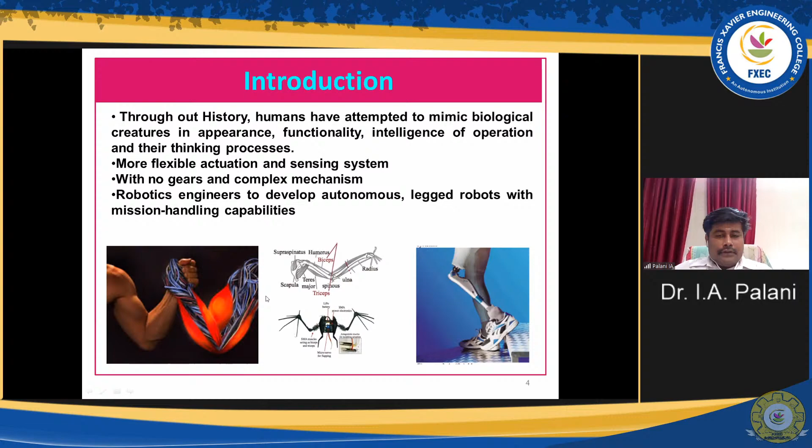For most conventional actuators we use a motor, but that is not possible for many kinds of applications. In biomimicking applications, it is very difficult to follow such actuation. So in those conditions, it's better to use an actuator which mimics the biomimicking capability in nature. Shape memory alloy is one such actuator which has a biomimicking capability.

Let me give you a small video on how a shape memory alloy works and how it biomimics. Here you can see a shape memory alloy being used.

Yeah, it has been programmed in the form of a lotus leaf. So this is a lotus leaf. This lotus leaf is made of metallic petals. When I try to heat it, it enlarges. When I try to cut off, it comes back.

So here we are trying to mimic the biomimicking capability of a lotus flower, just like that. Okay, so this is an added point with respect to the lotus behavior. Okay, so as far as this is concerned, let me just go back to the slides.

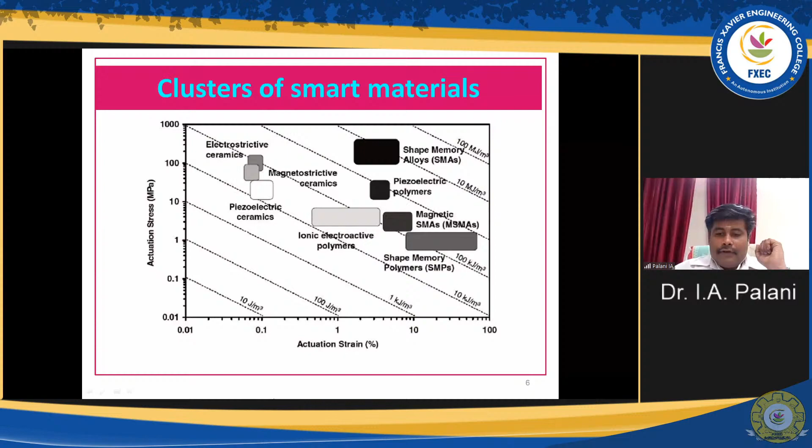So this is the overall family of the shape memory alloy. As far as this family is concerned, if you see, there are a wide variety of smart materials which are available. Among these, shape memory alloy plays a major role. As far as shape memory alloy is concerned, it is basically designed based on the actuation stress and the actuation strain.

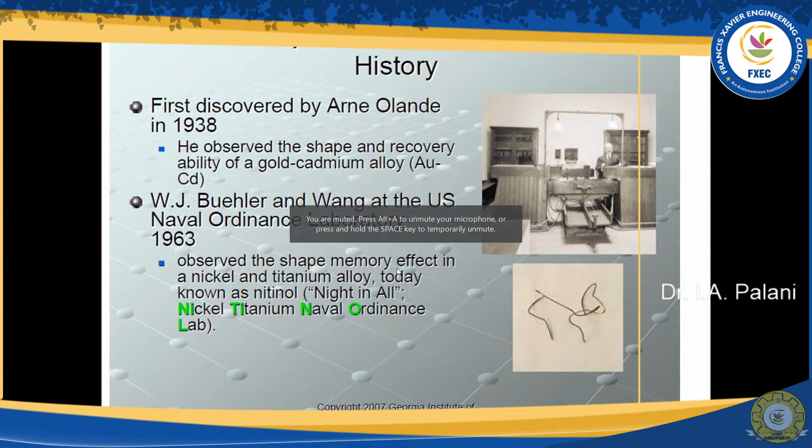If I try to closely observe it, this shape memory alloy was first developed in the year 1938 by Arne Olande, where it was observed that the nickel titanium based Naval Ordnance Laboratory has taken up a major role in it, and based on this nickel titanium Naval Ordnance Lab we have worked on. This Naval Ordnance Lab basically looked into the characteristics of the shape memory alloy.

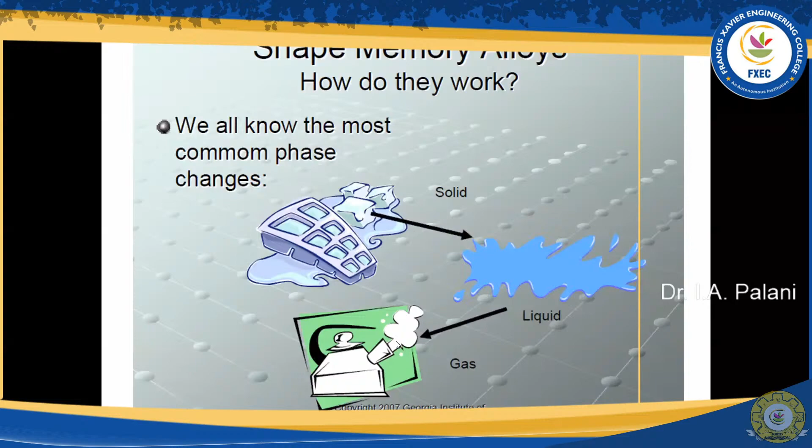As far as the shape memory alloy working is concerned, it is similar to your phase transformations. You have a solid, a liquid and a gaseous phase. From solid it is transformed to a liquid, and from liquid it is transformed to a gaseous phase. So we have a solid phase which is being kept and which is being transformed. So this is how it works.

So basically in this work we have an austenite phase, we have a martensite phase, and we have a twinned martensite. So when we try to look into it, we have an austenite phase which is working out. This will give you better clarity.

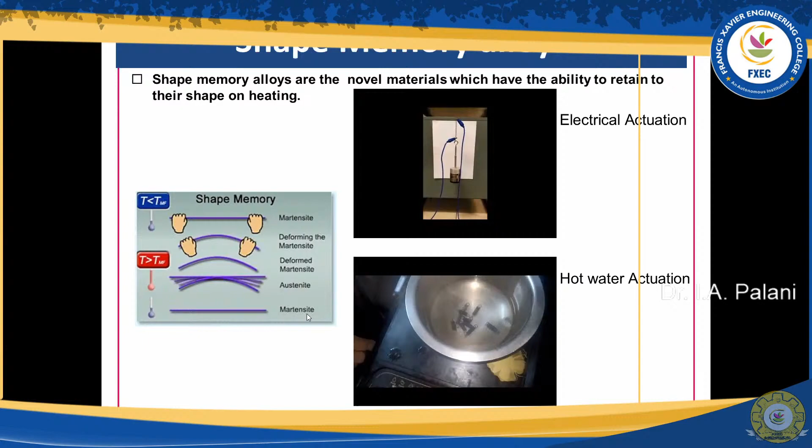Initially, this is in a martensite phase. Now I am deforming this martensite phase, so this is a deformed martensite. When I heat it, it comes back to the austenite phase. Then again, slowly it comes back to the martensite. So when I give the hot actuation, it tries to expand and it comes back. This is the overall perspective of shape memory alloy based actuation characteristics.

Okay, so now we have to look into some of the behavior where I have a shape memory alloy embedded into it. By actuating it or just placing it in hot water, it comes back to the original shape. These are the overall combinations: nickel titanium based, NiTi based, CuZn based, CuAl based, and Fe based shape memory alloys are some of the combinations which exhibit shape memory behavior.

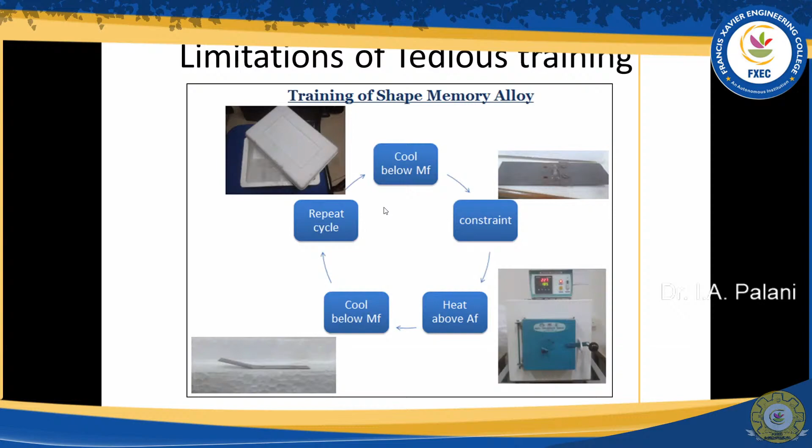These are some of the applications with respect to the tedious training. As far as this training is concerned, there is going to be a repeated cycle, and with respect to the cycle you will be moving on. The overall challenges involved are: one is tedious training, another is influence of composition, third is the thermomechanical behavior, fourth is developing towards the required shape memory alloy aspects. These are some of the basic challenges which we are going to look into.

Okay, so first let us talk about some of the aspects of developing commercial structures. This is the overall content of my talk, where we will be talking about one of the characteristics called shape memory alloy bimorph.

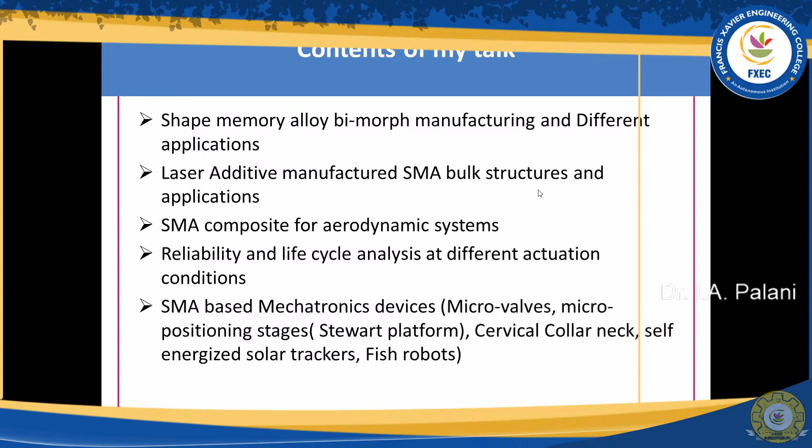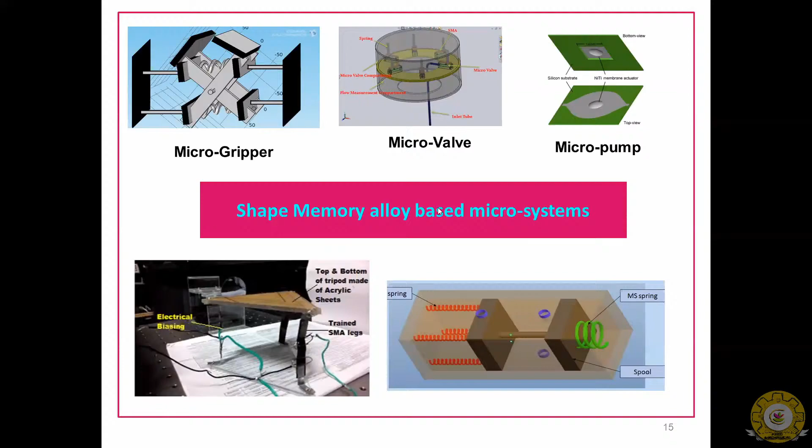As far as this shape memory alloy bimorph is concerned, we have developed some bimorph based structures which I would like to explain. Let us consider a thin film coated on a bimorph. One way of actuation happens because of the shape memory alloy, and the return way of actuation happens because of the bimorph.

Unfortunately, this is not working so well. One way of actuation happens because of the movement, and the other way happens because of the return stroke.

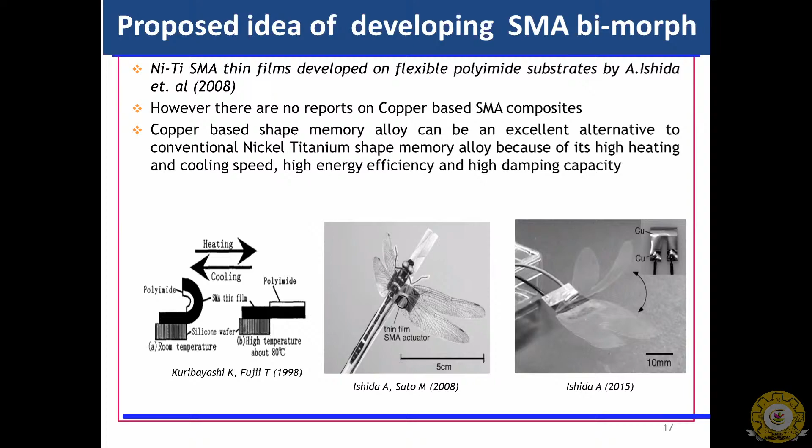With this, we can have a potential application towards a dragonfly kind of arrangement, so that by continuously actuating it, we get movement in such a way that you can go for lift kind of structures.

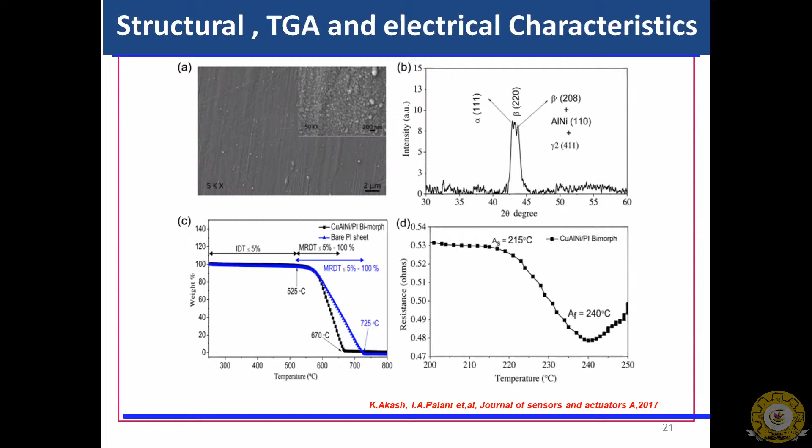We went for a detailed analysis of this. We looked into the different structural and electrical characteristics of the system, explored different substrate behaviors, and went on to a detailed analysis.

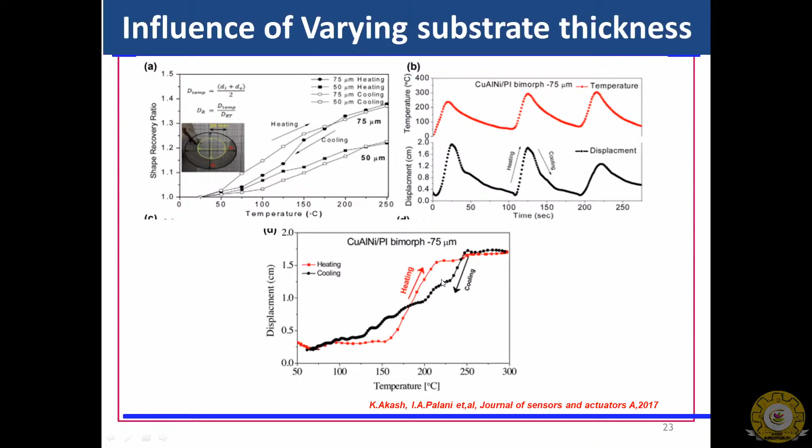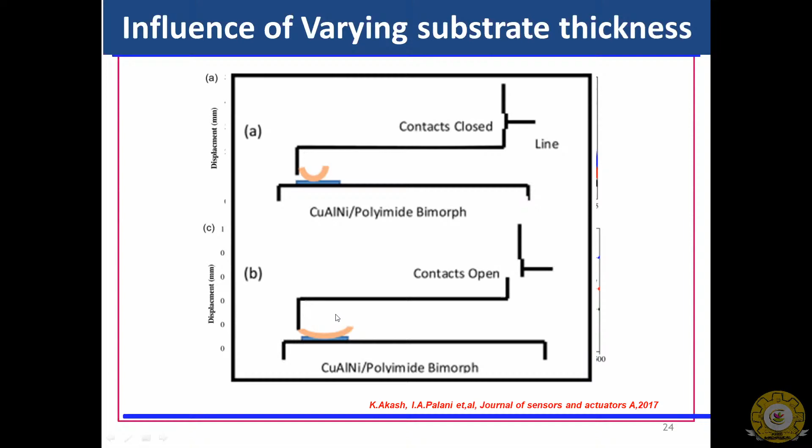This is how a contact is established. Here you have a CuAlNi based polyimide bimorph, and by opening and closing of this contact, you can have an influence on the system. By changing its characteristics, you can influence the varying thickness, as well as the growth substrate temperature.

Now we have a DSC characteristic in place. With this DSC characteristic, we can analyze the transformation temperature we have developed. In this case, I fuse the material and heat it in such a way that this heated material gets deposited, and then you can study the actuation behavior of it.

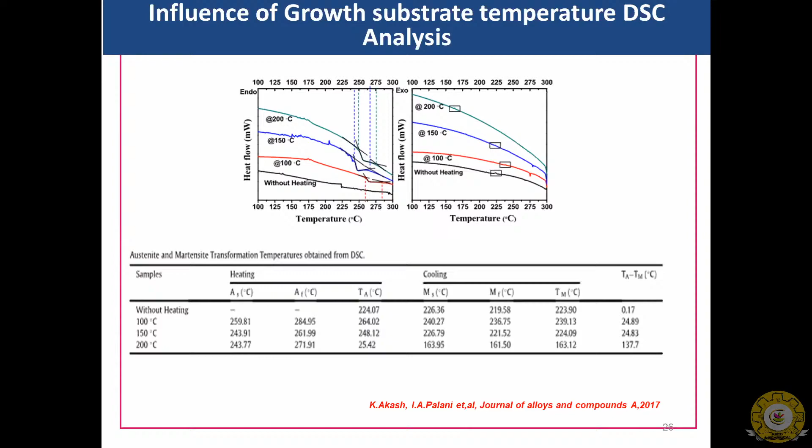This is the overall actuation behavior we observed, where we have included the influence of growth substrate temperature at DSC analysis, with room temperature and a closed circuit. With this closed circuit, we can observe what is happening.

This is the influence of Mn addition. We want to improve the ductility of this material, so we incorporated Mn into it. With this Mn addition, we could observe an improvement in the life cycle behavior of the system throughout.

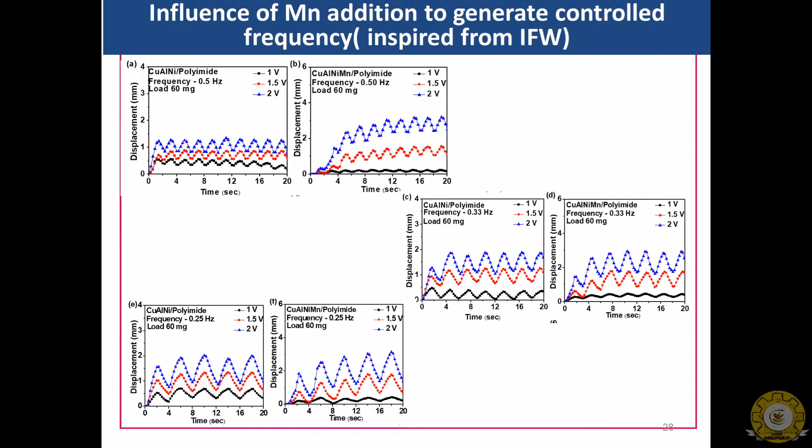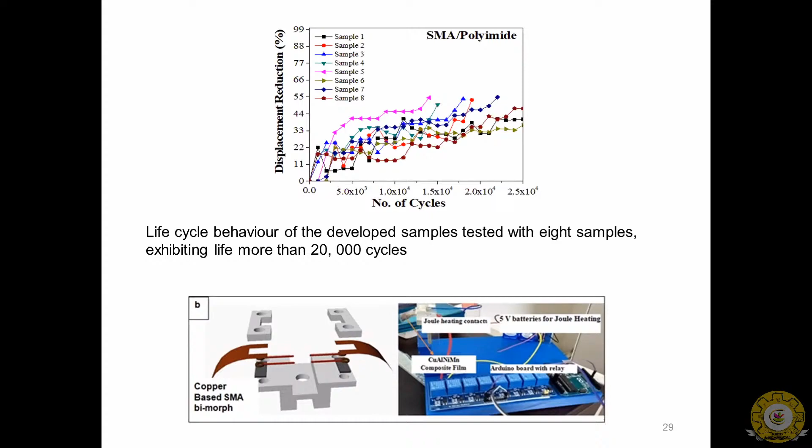This is the overall arrangement we made in our lab. We made a copper-based shape memory alloy bimorph in the form of a wing. When we actuate the wing, we can control the frequency, and with this frequency, we can achieve results similar to mobile robotic applications. That is one good example.

Let me show you a video of how we have employed the shape memory alloy bimorph with different combinations and at controlled frequency. This is with 1 Hertz frequency.

So here you can see a kind of arrangement. This is your shape memory alloy bimorph, which is being embedded along the structures. And you can see a movement over here. So we can achieve any kind of movement.

Basically, we have a constraint from 1 Hertz to 30 Hertz frequency, and this has been achieved using this system. This is completely indigenously developed in our lab, and you can achieve a required frequency based on your own applications.

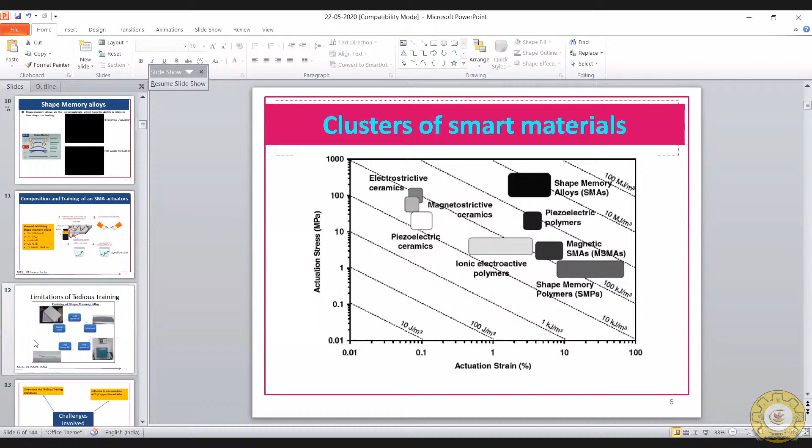Okay, now we will go back to the slide. So now we are going to talk about another case study, which is sensing the transformer oil contamination.

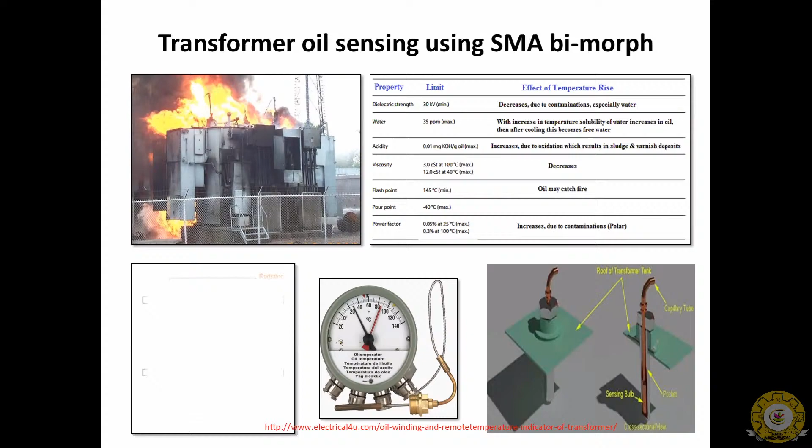So what we have done in this transformer oil is, we have kept a shape memory alloy. We all know when a transformer explodes, it's because when the transformer oil gets heated up due to a huge amount of contamination, there will be an explosion in the transformer oil.

Consider we can have an arrangement something like this. Inside this transformer oil, you are filling up with the liquid, and then immersing the shape memory alloy bimorph inside it. So when you immerse the bimorph, because of the heating characteristics, there will be some kind of deflection which happens.

And this deflection can be studied using this LDS system. This LDS system can easily adapt to the unit, and from that unit we can observe what is happening. So this is how we can work on the LDS unit, and we have used it for our own application and studied it in detail.

So this is an arrangement of a laser displacement sensor which is being employed, where light is falling on the bimorph, and the bimorph is deflecting. From the deflection we can achieve what is happening.

Okay, next application I'd like to discuss is related to Johnson's heat engine. Since the shape memory alloy responds to waste heat, what we can do is make the shape memory alloy in the form of an arrangement where there is a hot and cold junction, then we can have continuous rotation.

For example, we all know we have an automobile system. You can take a simple car. When you switch on the car, in your bonnet you can expect a temperature that easily reaches around 80 to 130 degrees Celsius, just on an initial idle phase.

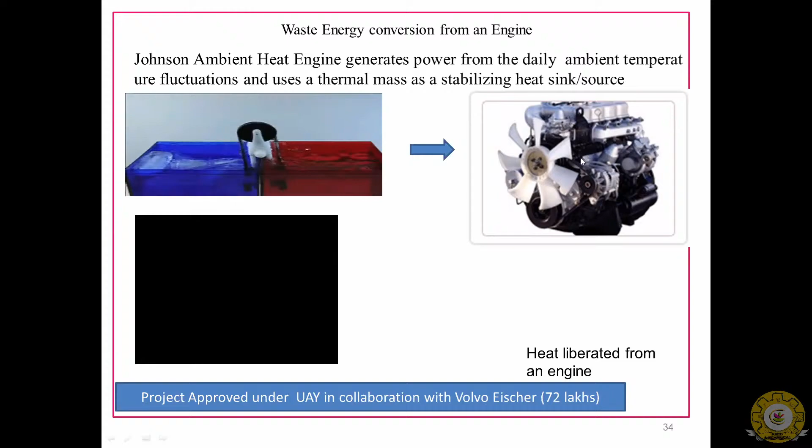Instead of going for a shape memory alloy wire, we thought of making a shape memory alloy bimorph based belt. This is a system we developed in our laboratory, where you have a pulley kind of arrangement - this is a roller and this is a pulley. In this pulley, we were placing our polyimide bimorph.

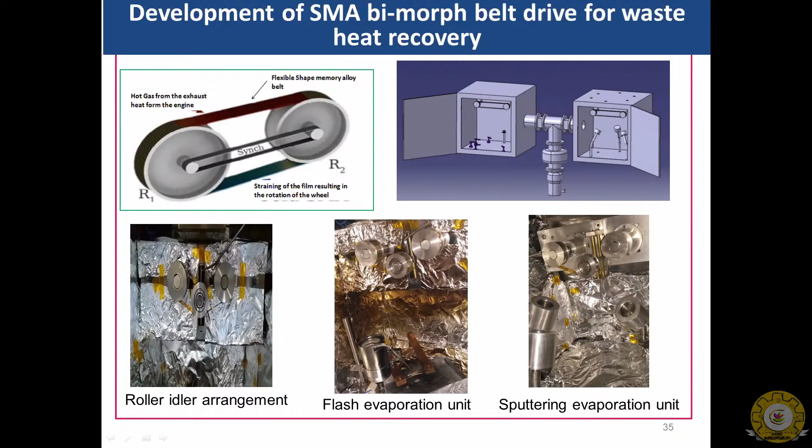This is the arrangement where continuously the material powder is being fed, and there is a continuous kind of evaporation. Because of this evaporation, finally you end up with some kind of belt arrangement. From this belt arrangement, you can just harvest the energy which is coming out. So this is an interesting aspect with respect to this shape memory alloy bimorph.

As far as this shape memory alloy bimorph is concerned, this is the initial setup which we developed and tested, where we had a Volvo truck. Basically this is a sponsored project from Volvo, where we had an exhaust. Near the exhaust, we made a shape memory alloy wheel, and we made the wheel rotate, continuously trying to harvest the energy coming out of it.

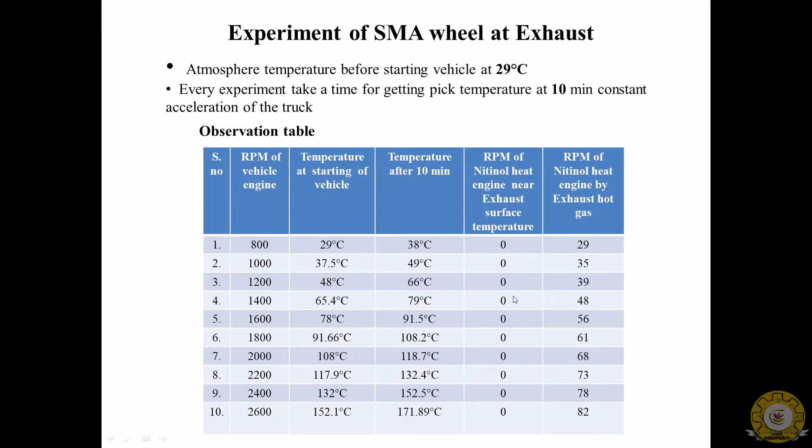So this is the overall results we got. We went for different RPMs, and from that RPM we were trying to study the temperature characteristics. From the temperature characteristics, we were trying to look into the Nitinol-based heat engine system.

There are quite a good amount of videos available, but since there is an issue with interfacing, I am not playing the video now. At the end of the presentation, I will be playing the video so that you can get clarity.

Next, what we're talking about is developing tailor-made shape memory alloy structures. Let me give you a simple example. We all know about Industry 4.0. Industry 4.0 is about making the machine intelligent. To make the machine intelligent, you feed a sensor into it, so the system can talk to other systems, as well as be interfaced with the internet, so you can monitor the performance of the system through it. That's the idea.

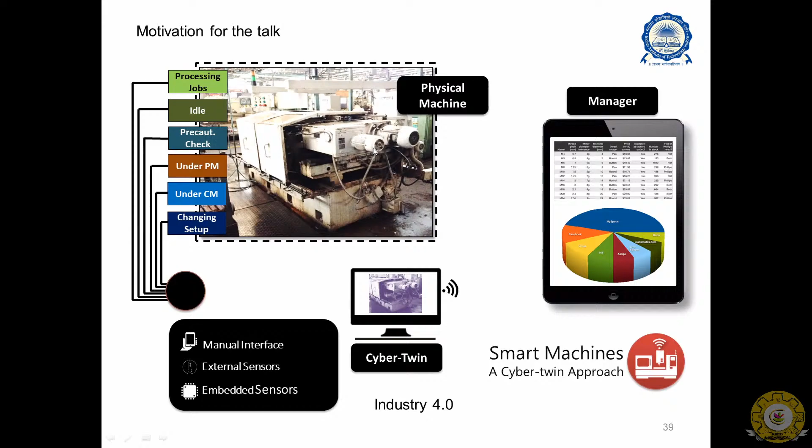As far as this idea is concerned, we are planning to have the system set up so that if I need to integrate a smart material inside it, I need to do so such that whenever there is heat, the smart material will sense it and give an input. Let me show you this example.

To arrest this vibration, you need to tap it in such a way that there will be an arresting kind of mechanism. By arresting, you can hold the drill bit, and with respect to that drill bit, you can arrest the vibration. For this, I need to make the shape memory alloy in the form of a ring, which is my major challenge.

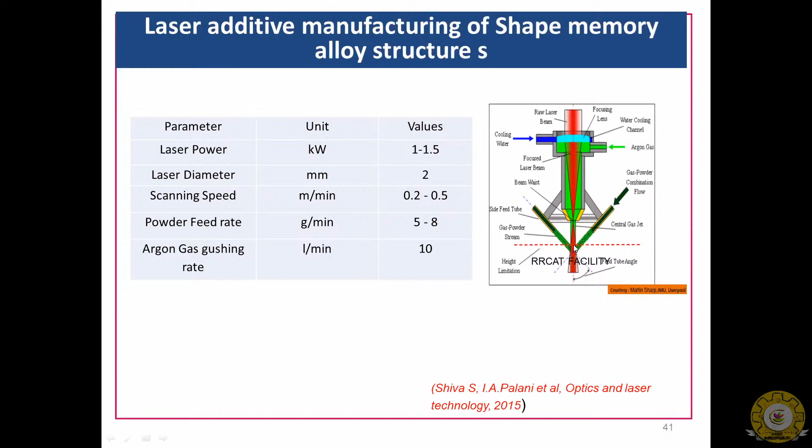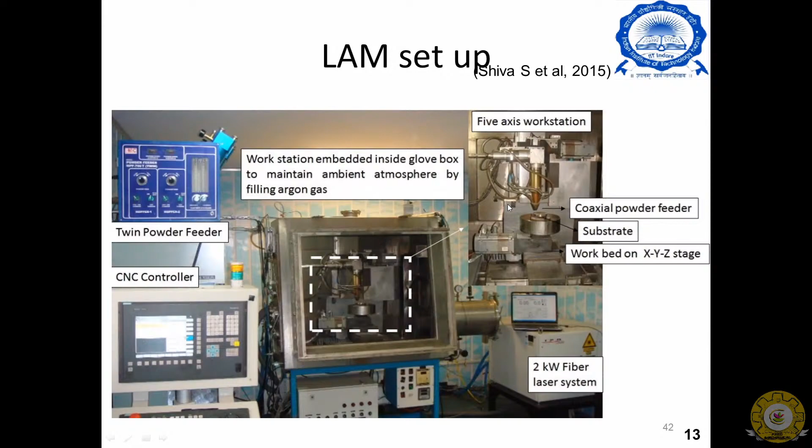What we employed is the metal 3D printing facility we all know about. In this metal 3D printing system, we used two different materials and fused them exactly at the focal point of the laser. This is the overall system, with a coaxial feeder kept into it. Once you feed the material through this coaxial feeder, you heat it up, and finally you end up with such kind of structures.

The interesting part is you can make a tailor-made structure coming out of it, and you can fix this structure to get any kind of vibration arrangement or vibration analysis. Second, you can have a cross-section geometry, from which you can observe how much variation is coming up.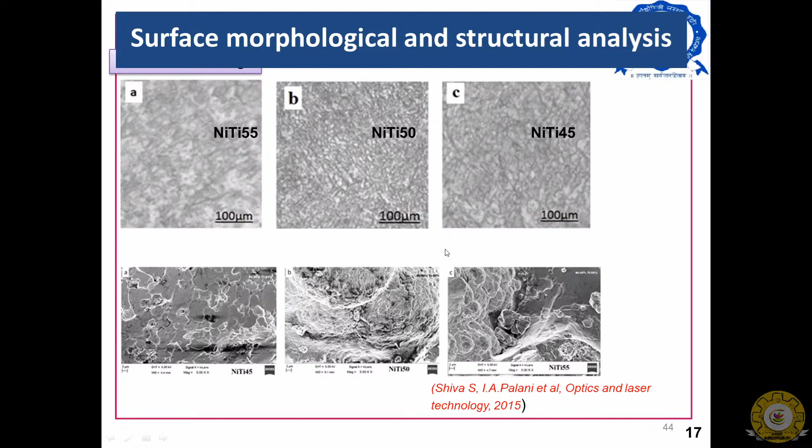This is the overall structural analysis we observed. Based on this structural analysis, we can see where exactly the nitty-gritties are happening, and the mechanical properties involved, which we have investigated in detail.

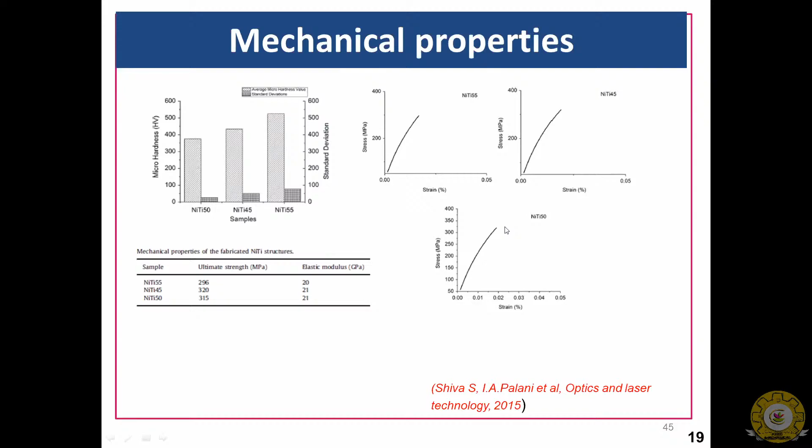So when we go for laser peening and laser annealing, it is easy for us to make a tailor-made property of the shape memory alloy similar to the conventional system. So that is one arrangement.

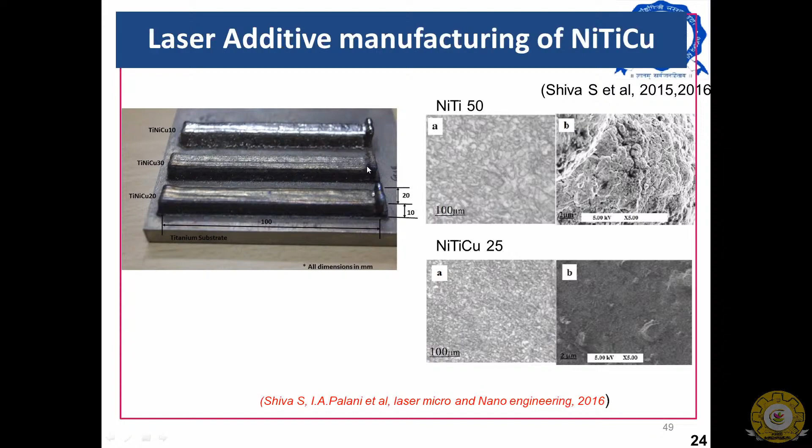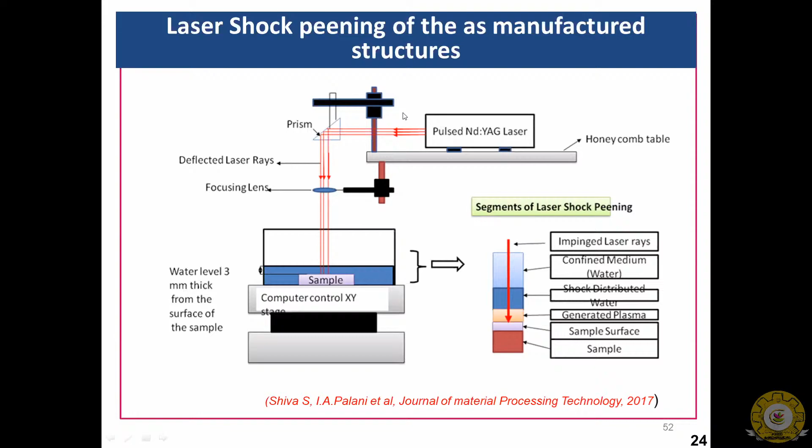So these are some of the shape memory alloy bricks which have been fabricated, and with these shape memory alloy bricks, you can employ it in some kind of machine. But the problem in this is, since we used a laser, we had our own defects, which were rectified by some of the post-processing techniques mentioned over here. But finally, we could achieve a system almost at par with the conventional system.

But the major drawback in this is, I would suggest, that it is very difficult for us to control the required environment. So for that, we went for our own unit, a wire arc based additive manufacturing technique. Using this wire arc based additive manufacturing technique, you can have control over the property of the material.

And apart from that, instead of going for a powder feeder, we went for a wire feeder, so that by feeding this wire, you can melt it and create any kind of structure. So that is an interesting part with this system.

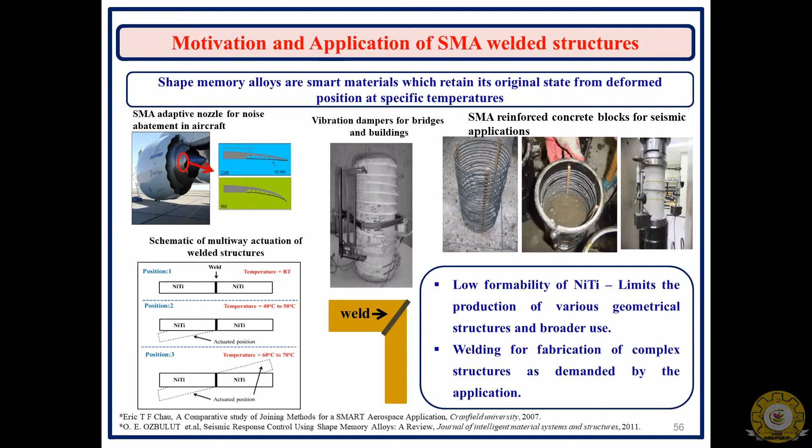But the major challenge is how to weld these structures. If I go for conventional welding, there is a chance of some change in transformation. When a change in transformation happens, it loses its shape memory behavior. So as an alternative, we thought we will go for a friction stir welding unit. So this is a friction stir welding.

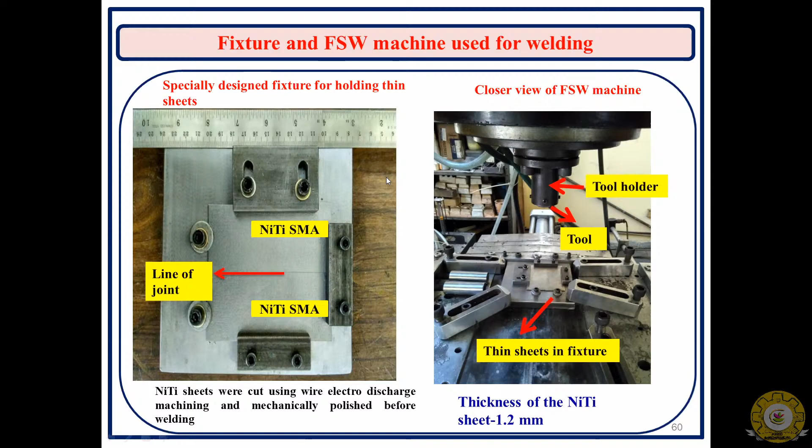In the case of friction stir welding, obviously you can somehow reduce the heat on the surface. Second thing, because of the plastic deformation, you are trying to improve. When you improve the plastic deformation, the tool and the die design will move in a particular direction, and with respect to it, there will be a kind of retreating side.

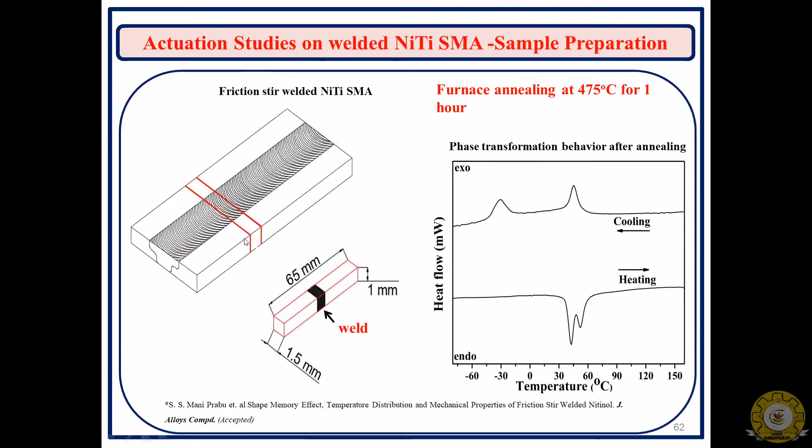So based on the retreating side and actuation study, this is the kind of arrangement we have made, and this is the sample which we have welded. We diced the sample in the form of a thin foil using an EDM technique. And from this, we could see a proper actuation, or I would say a proper recovery.

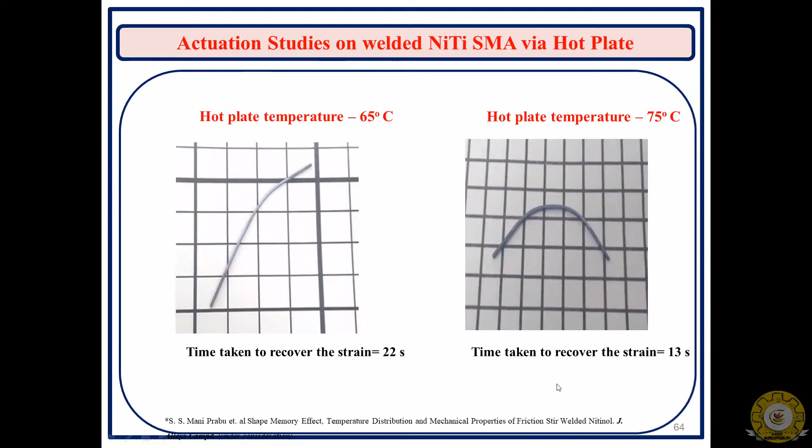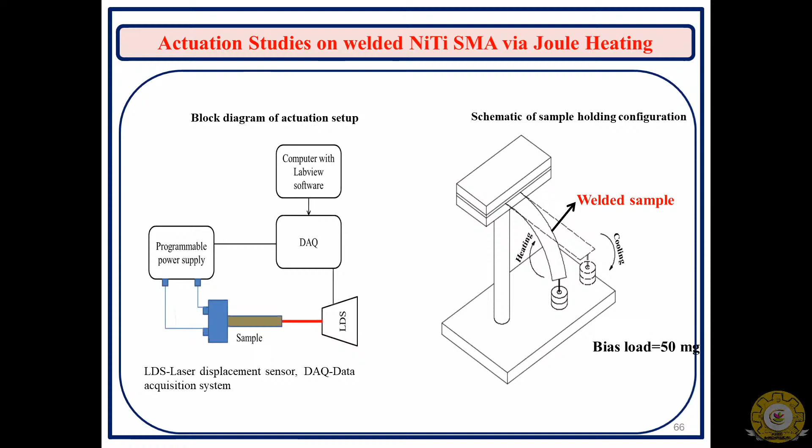And this is exactly where the weld region is. Because of this welding, you get a straight deflection coming out. So even if you weld it, you can get proper actuation characteristics. With this, we can employ it in some kind of aerodynamic structure, and by employing such structures, you can reduce the load on your engine and have better efficiency.

In fact, we did some simulations. Basically, we simulated the sample in such a way that by continuously loading it, you can have continuous actuation coming out of it. Okay, so these are some of the actuation based life cycle behaviors which we have employed.

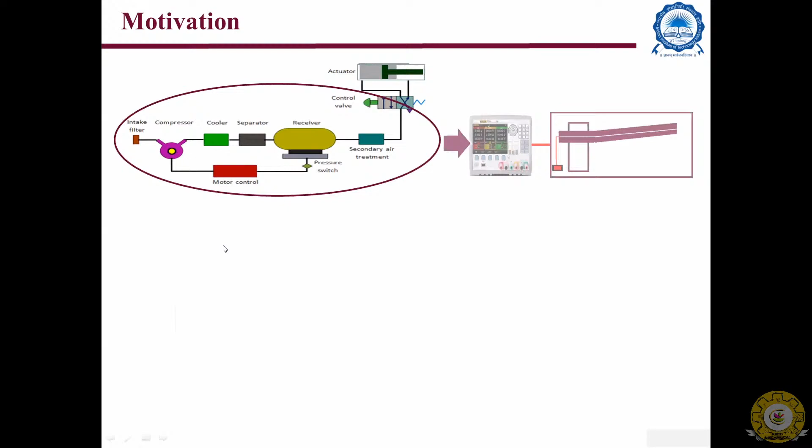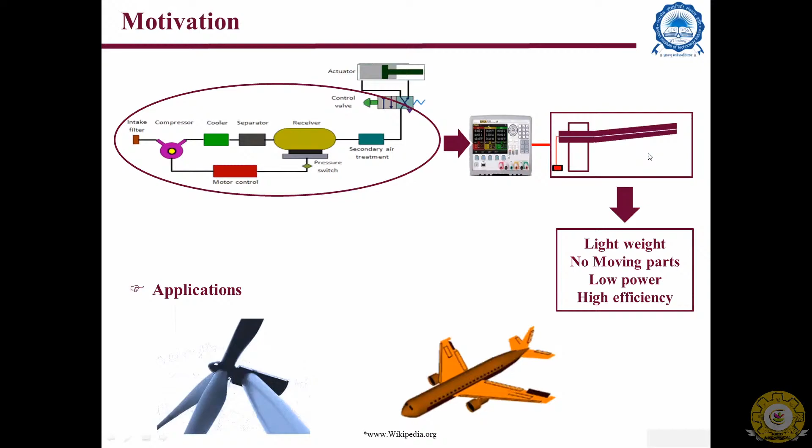The next one I would like to talk about is developing an intelligent shape memory alloy based aerodynamic structure. What we have done is, we made a composite structure, and inside this composite structure, we have embedded shape memory alloy. By actuating it, you can have a deflection coming out of it. It's a simple composite layer, but it is something like programming this composite layer based on your requirement.

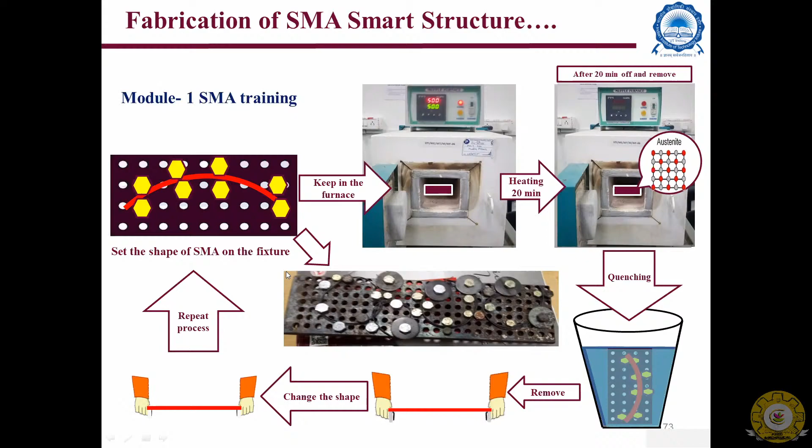So that programming of that composite layer is done using this layer which is being kept over here. So what happens is, by whatever programming you require, you just embed the shape memory alloy inside it, and then you integrate a composite layer into it, and that composite layer will act as an intelligent medium. So this is one good example.

So here you have a layer and you have a wire which is being placed in it, and you have a composite layer which is being placed in it, and then you are trying to give some kind of strain to it. When you apply a strain, because of the fiber and the resin, you can have such kind of actuation. So this is one kind of arrangement.

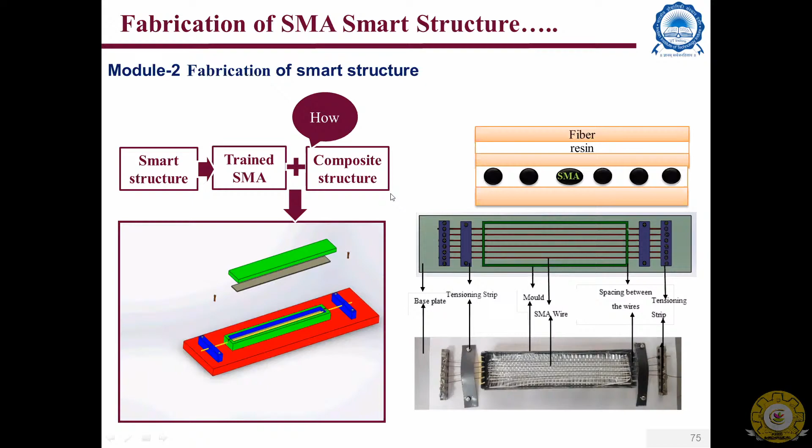So how a fabrication has been done: I can show you a video of how we have integrated these shape memory alloys inside these composite structures, and how these composite structures are being employed for different applications. So this is a video which shows how a composite structure is being employed, and this composite structure is being deflected in such a way that you can get a life cycle behavior coming out of it.

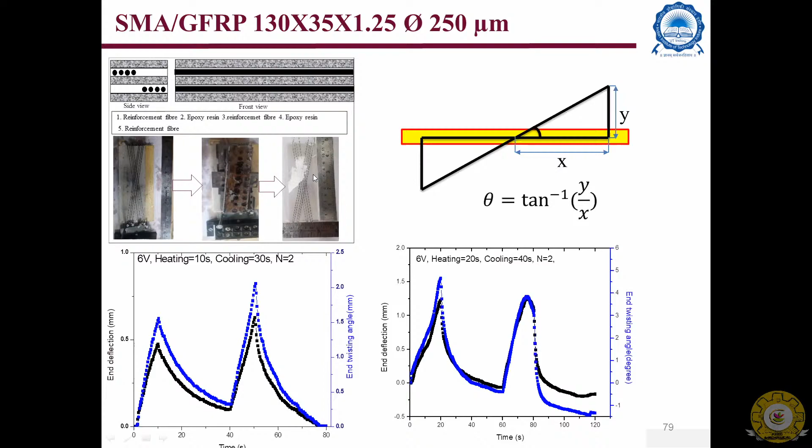So inside this composite structure, I'm integrating the shape memory alloy wire, and you can get a required theta angle orientation based on the training or based on the programming which you are embedding inside the shape memory alloy wire, which is being kept over here. And this is the life cycle behavior which is coming out of it.

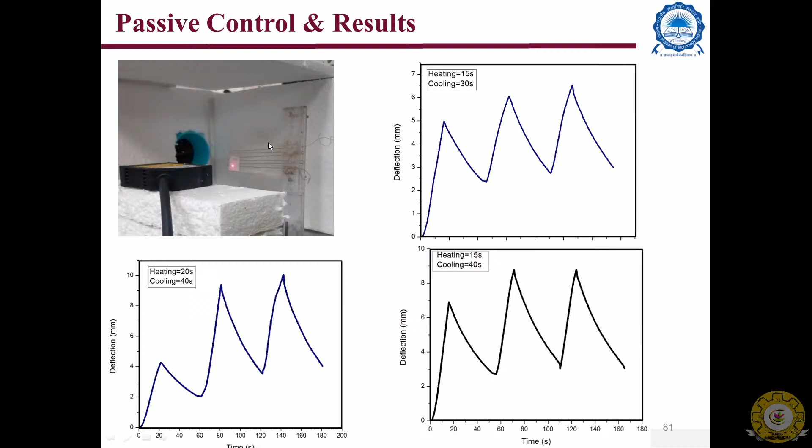Okay, and since we want to use it for aerodynamic structures, we were looking into some applications where we can use it for low temperature. So for that, we made a liquid nitrogen environment. Inside this liquid nitrogen environment, we kept the shape memory alloy wire embedded composite structure, and we made the liquid nitrogen flow into it. So when you actuate it, you get a deflection, and from this deflection, we can see what is happening.

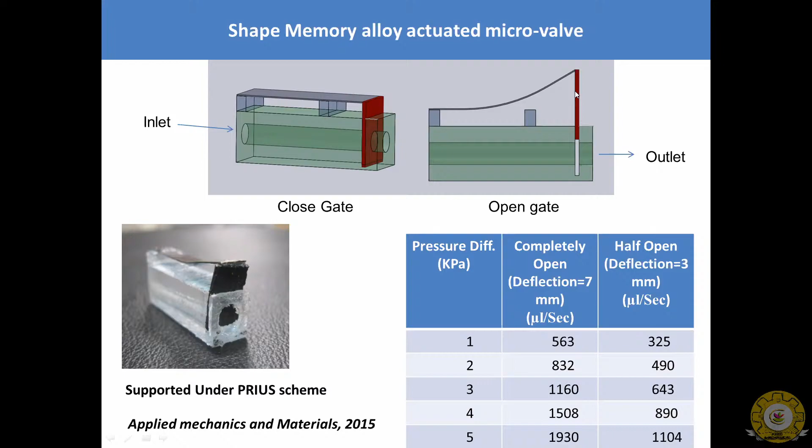And apart from that, we have also developed a small micro valve arrangement. In this micro valve, we made a shape memory alloy L kind of structure, and this is a tube through which the flow happens. Through this tube, you can have opening and closing of the system. When you open and close the system, you have control over the flow rate, and from that flow rate, you can observe what is happening.

So this is an arrangement we have made, where you have a complete profile which is being kept over here. On this profile, we have kept micro valves, and inside these micro valves, when you heat it, there is an opening and closing of the system. And here you have a spring kind of arrangement. When you actuate it, an opening and closing of the system happens, finally resulting in micro mixing, and from that micro mixer you can get out the unit.

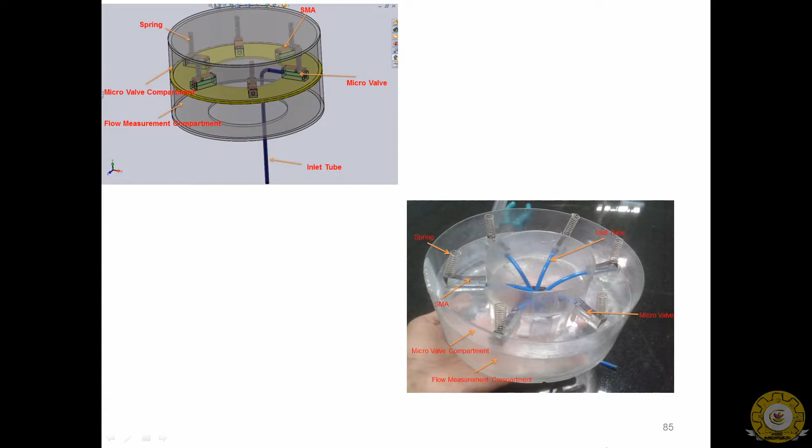Okay, so now in this case, we were more concerned about the life cycle of the shape memory alloy spring. So what we did is we made a small thermomechanical setup. In this thermomechanical setup, we had an arrangement in such a way that you have a pulley and an SMA spring. In this SMA and pulley arrangement, when you try to actuate it, there is a deflection happening in it.

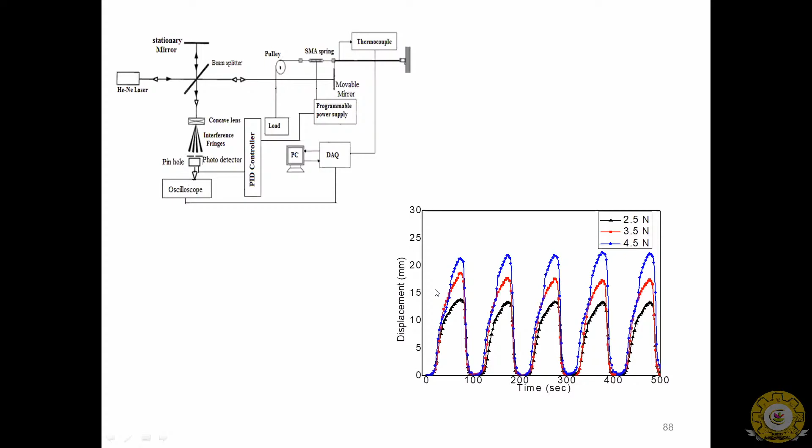And with respect to the deflection, you have a helium neon laser placed, and you have a stationary mirror. With this stationary mirror, there is a kind of deflection happening, and from this deflection, you can see what is happening in the system. So this is a setup which we made in our lab to study the shape memory life cycle of the shape memory alloy spring. In fact, this is one characteristic which will give you a better idea of how the shape memory alloy spring works and how it moves.

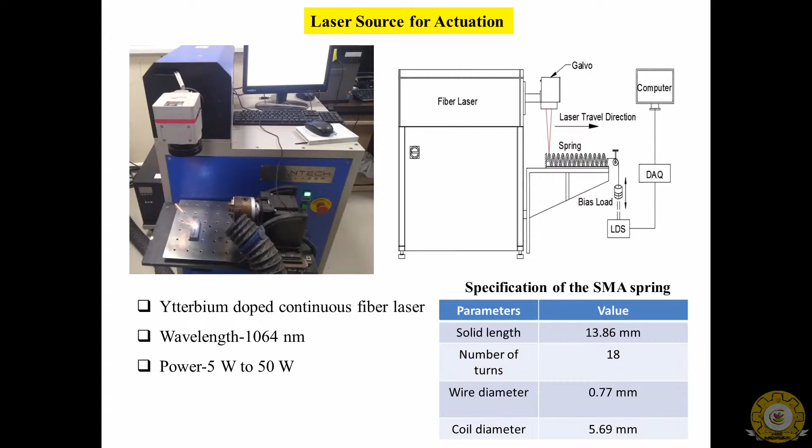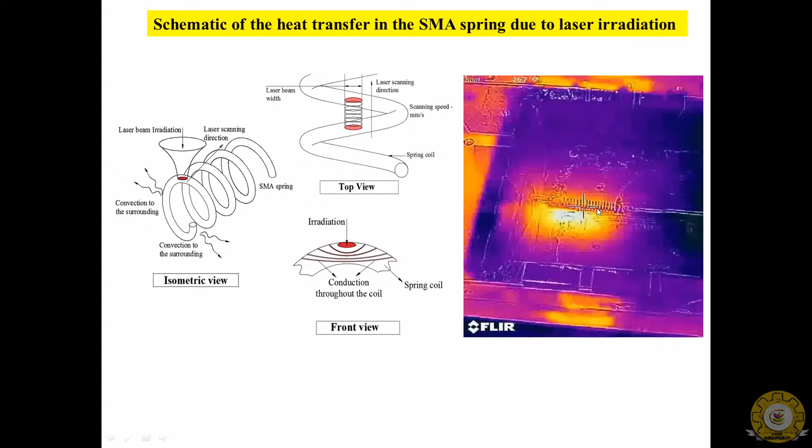Okay, next, this is with respect to the characteristics where you have a spring and you are trying to actuate it. When you try to actuate it, you are just putting it in a hot water condition and trying to see how it moves. And we also want to explore the possibility of using laser based actuation, where a laser is used for heating it up so that it acts as a non-contact mode. Using this non-contact mode, you can have opening and closing of the system, and by that you can study the deflection.

So in fact, we tried to go for a non-contact actuation. This is one small video which will give you clarity on how the non-contact based actuation happens with respect to a shape memory alloy. You have a shape memory strip and a laser light falling on the surface, and when you try to actuate it, you can see the lifting behavior. Here there are no electrical circuits employed.

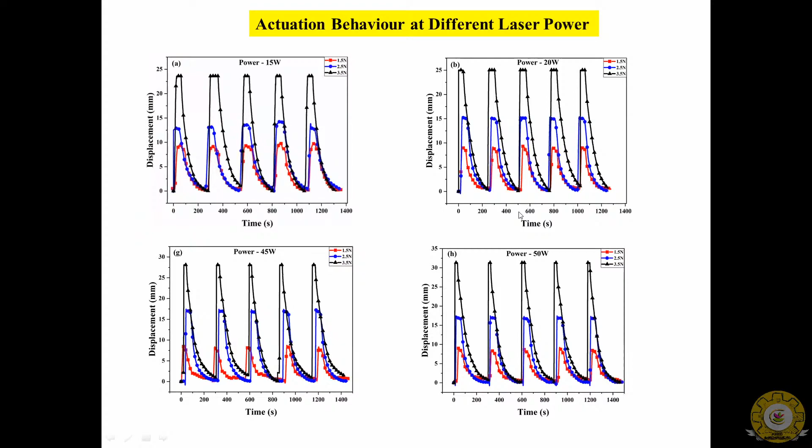Second thing is, these non-contact based actuations have a potential application where, for example, you have a boiler. Inside the boiler, if you have a wall where it is not possible to embed an electrical system, in those conditions you can use laser based actuation. And these are some of the characteristics of laser based actuation. Because we are more interested in the life cycle behavior, we are analyzing it in detail and working on the same.

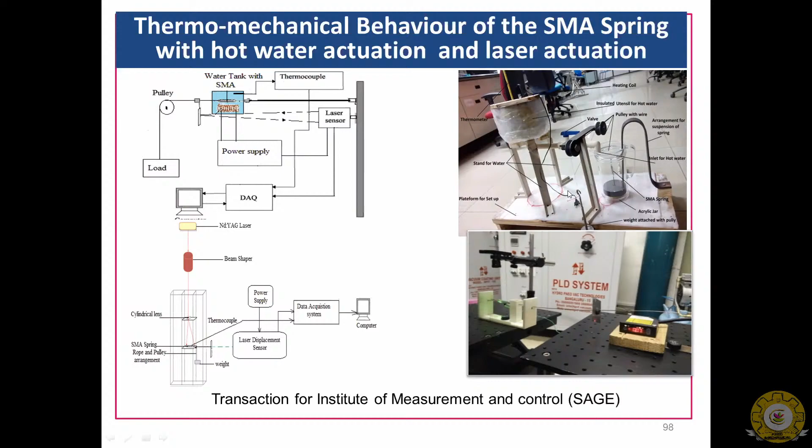Okay, so next, this is the thermomechanical behavior of the shape memory spring which we have embedded. This is one case study which we have developed in our lab. Most people, you might have seen, wear a collar for their cervical issues. So what we thought is, since we have a shape memory alloy which is highly delicate and has its own actuation characteristics,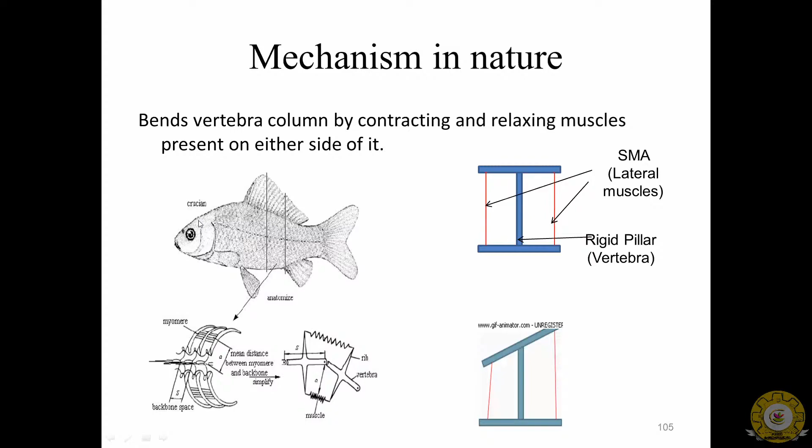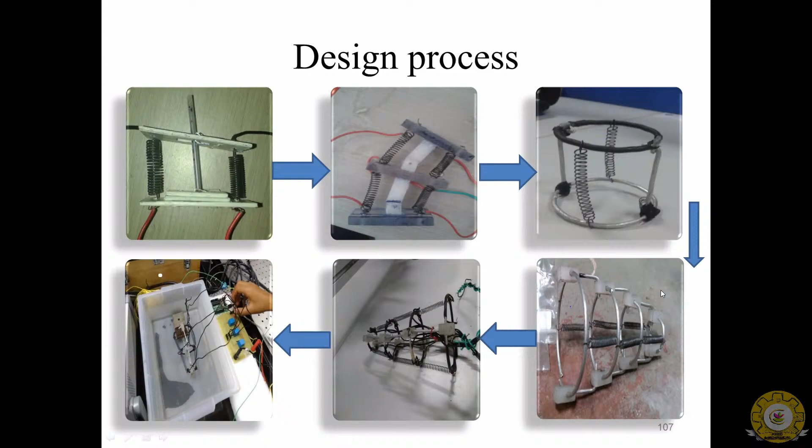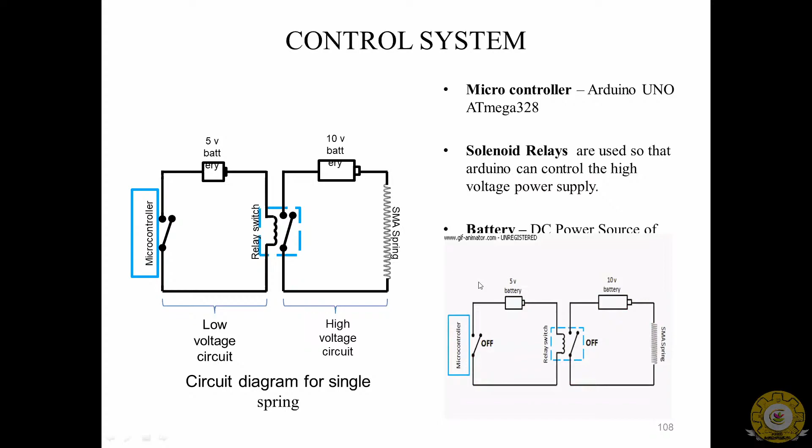And this is the overall control system strategy, which is employed by opening and closing a switch. So you can just have a relay switch. And this is the skin kind of arrangement, which will be employed for taking care of the buoyancy, and this is the overall control scheme.

Okay, so I will just show you a small video. I'm switching to the video mode now, where you can see some of our contributions.

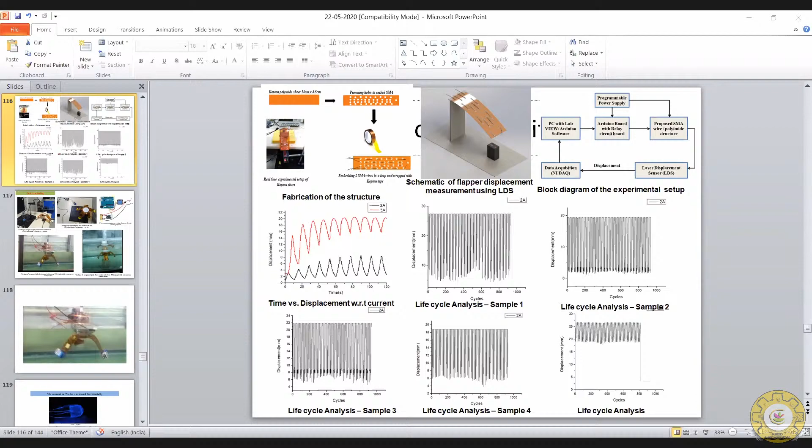Okay, so here you can see the shape memory alloy fish which was developed in our laboratory. We have an arrangement with a shape memory alloy spring embedded into it, and this spring is capable of creating the buoyancy.

And here we have an onboard controller. Later we embedded this controller inside the system so that it can be directly controlled, and it gives a forward and a return stroke. Apart from this, we have also developed a small jellyfish kind of arrangement, which I would like to

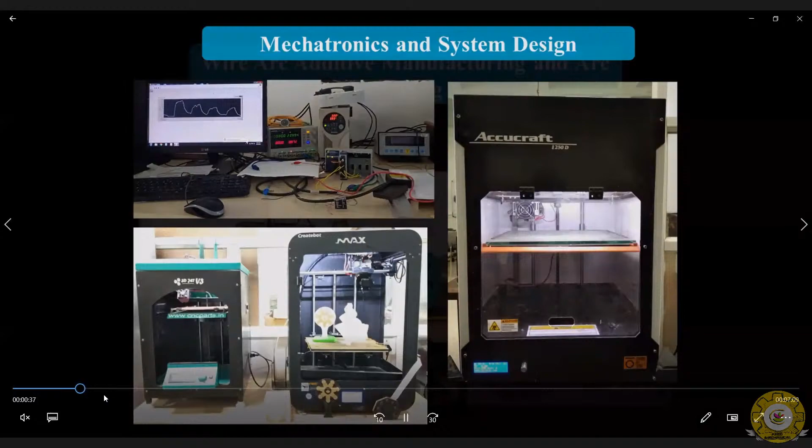These are some of the systems developed in our laboratory, and some of the arrangements in our lab. This is a 3D printing facility we have. This is a metal 3D printing unit, where you can see we are feeding the wire. This is a wire feeder, and through this wire feeder we are fabricating tailor-made shape memory structures.

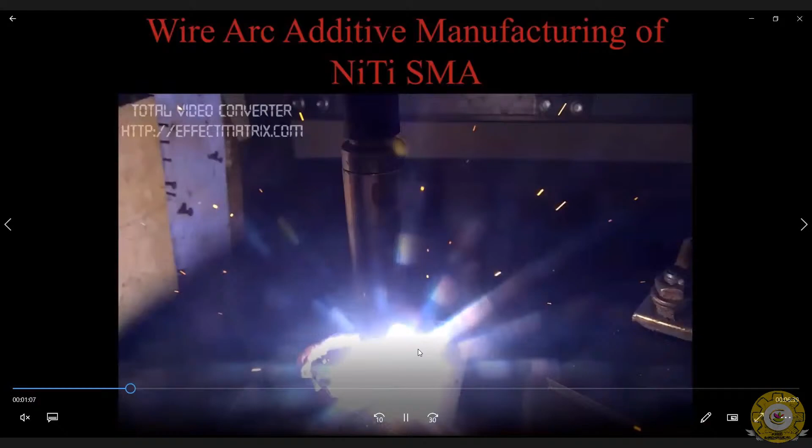Right. So I'll just show you some of the structures fabricated in our lab. These are some of the structures which have been fabricated in our lab. Any kind of tailor-made shape memory structure can be fabricated in our lab.

And this is a simple simulator unit which we have developed in our laboratory. Basically, it has a laser displacement sensor, and using this sensor you can study its fatigue behavior. We have made the arrangement so that you can continuously monitor it, and we can study the life cycle and the failure modes of the system.

Okay, so this is a non-contact, laser-based activation setup which we have developed in our lab. And this is a laser forming technique we developed, where by just actuating it, you can create any kind of cross section. Basically, the idea behind this is part of die-less manufacturing.

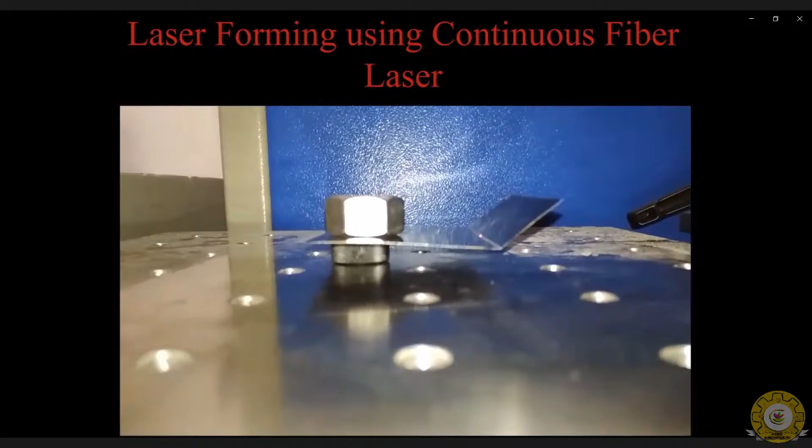Okay, so this is some kind of laser forming which we have developed, for industry operation. This is the composite structure I was explaining, where an SMA is integrated inside the structure. These composite structures are used for missile flapper applications.

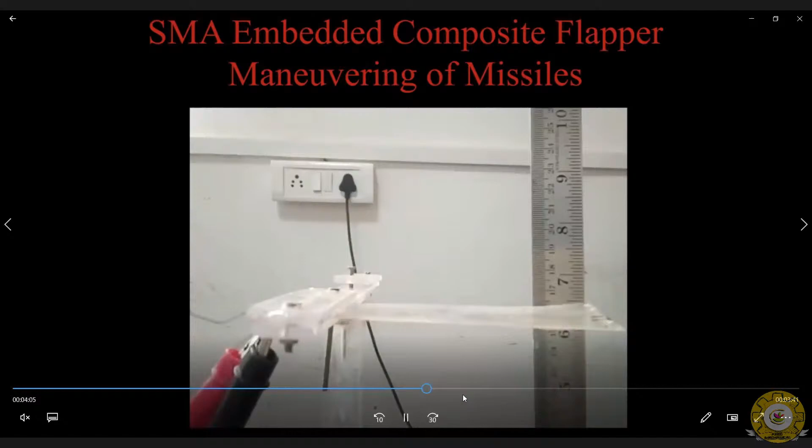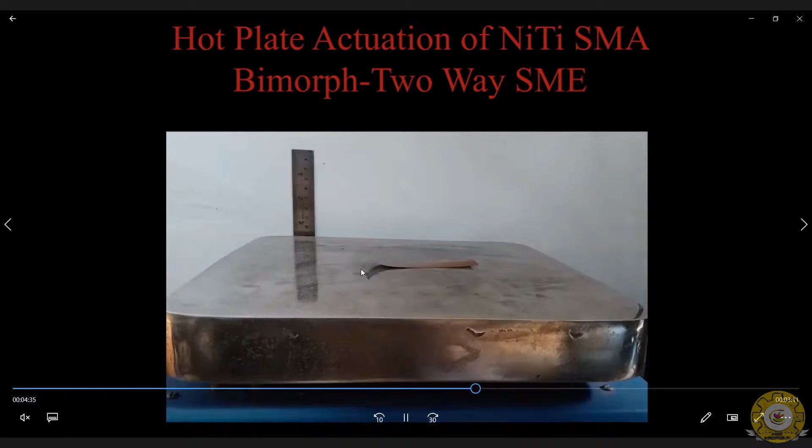And this is a SMA heat engine which we have developed in our lab. So in this SMA heat engine, you have shape memory spokes which are placed. When you try to heat it, you get a continuous rotation. And this is a shape memory bimorph which we have developed in our lab. So by putting it on a hot plate, you get a straight arrangement. When I try to lift it, it comes back.

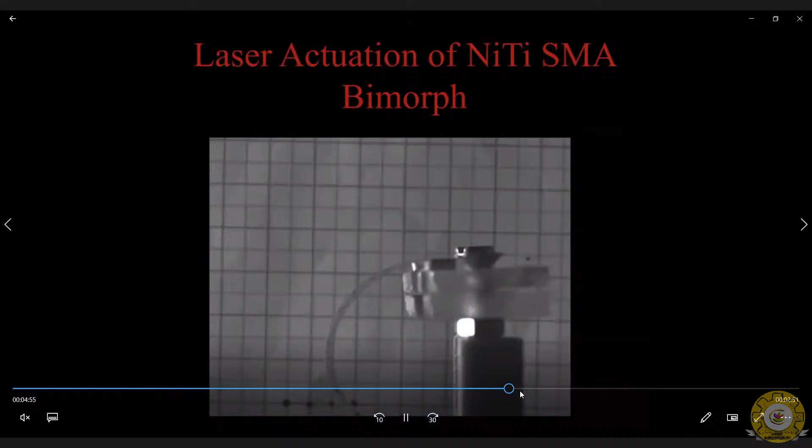So this is a jellyfish kind of arrangement which we have developed in our laboratory. Basically, it is a part of one of our projects with DRDO, where it is used for surveillance application. The interesting part is that there are no heavy motors placed in it, so it can easily escape from radar. Second thing is it has a capability to have an onboard controller, so that you can click pictures and send them to the onboard system. So it is in the development stage.

And this is the robotic fish which we have developed in our lab, where we have integrated SMA springs inside it. And this is a small self-energized piezoelectric structure which we have developed in our lab. These piezoelectrics are quite interesting. When I apply load to it, I get a certain amount of potential difference

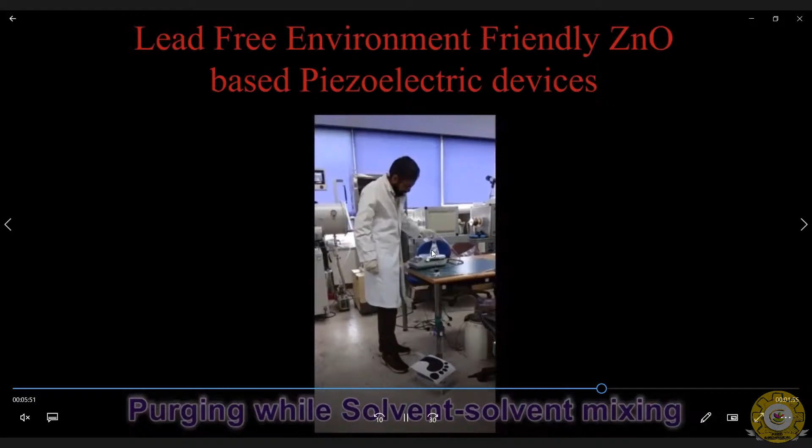coming out of it. So we have made a piezoelectric based mat, so that when someone stands on it, because of the power which is generated, you can drive your chemical reaction. You can get quite a good amount of power for your chemical reaction. In fact, we have also made a burglar alarm kind of arrangement. This device is kept over here, so if someone stands on it, because of the load, you immediately get an alarm sound. Here there is no separate electricity you need to provide. Based on the amount of load you apply, the alarm strikes. The alarm energy is taken from the load placed on it.

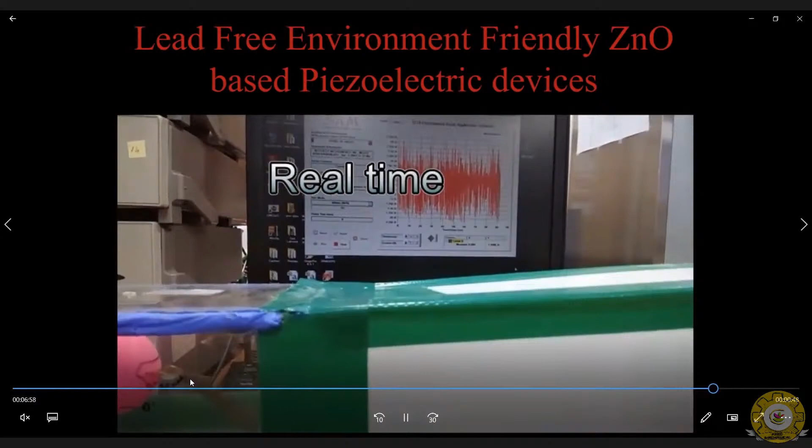In fact, we are trying to implement it in a flag. Where you have a flag and a flexible thing, the flag can flutter at a very high speed. Since you are integrating piezoelectric structures inside these flags, you can harvest the energy. So this is a wind tunnel experiment, and this is our piezoelectric structure, and by giving the environment, we can harvest energy. The interesting part is, for example, in a remote location, the only option available for power generation is a wind turbine blade. But nowadays we can even use a fluttering flag.

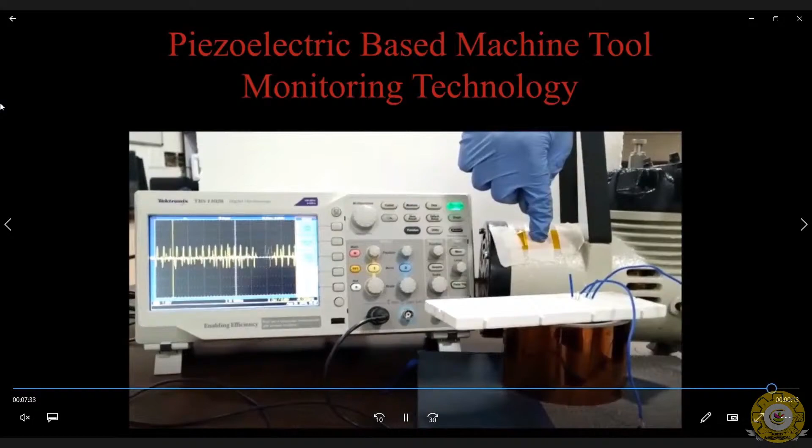And this is one arrangement. It is mainly meant for machine tools, where I have a compressor. Over this compressor, I have a piezoelectric. Because of the vibration in the compressor, I can harvest energy. So like any lathe or any drilling machine you have, you can harvest with such a unit. So these are the interesting parts with respect to it.